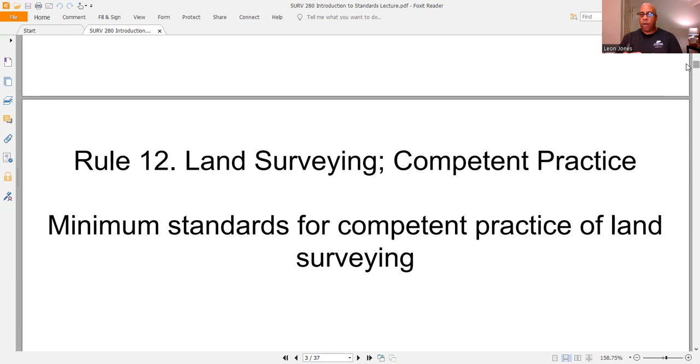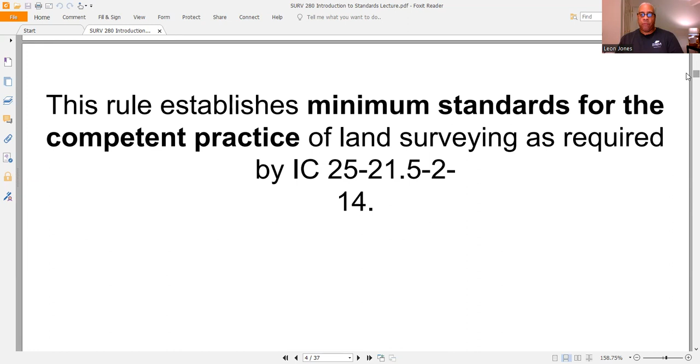All right, as I move down here. As we talk about the IAC, which is, of course, the Indiana Administrative Code, here we have the Indiana Administrative Code 865, Rule 12. Rule 12 is the minimum standards for competent practice of land surveying. Now, the rule establishes minimum standards for the competent practice of land surveying as required by Indiana Code, which is IC 25-21.5-2-14. And that says the failure of a registered land surveyor to comply with the provisions of this rule may subject the registered land surveyor to sanctions as provided in IC 25-1-11.

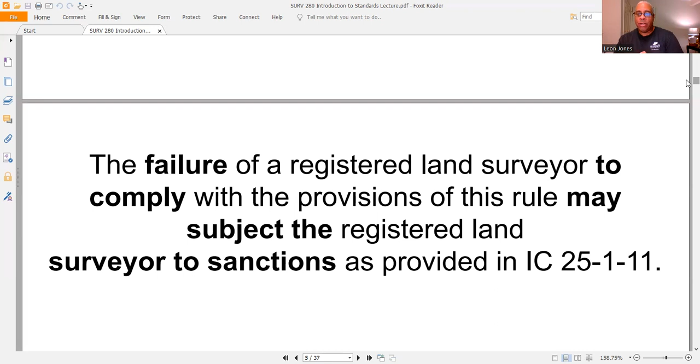Correction. Make a correction. The failure of a registered land surveyor to comply with the provisions of this rule may subject the registered land surveyor to sanctions as provided in IC 25-1-11. That's my correction. I said IC 25-11-1. Looks like I had a little dyslexia. I don't. I just read the information incorrectly. It's under IC 25-1-11.

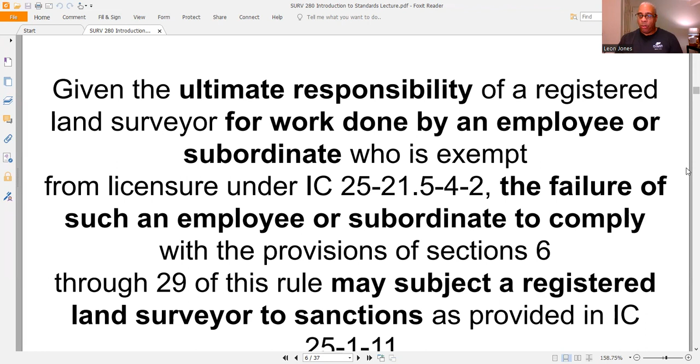Now, given the ultimate responsibility of a registered land surveyor for work done by an employee or subordinate who is exempt from licensure under IC 25-21.5-4-2, the failure of such an employee or subordinate to comply with the provisions of sections 6 through 29 of this rule may subject a registered land surveyor to sanctions as provided in IC 25-1-11, unless the registered land surveyor did not know and could not, with the exercise of reasonable diligence, have known of the act or omission by the employee or subordinate.

Nothing contained in this rule shall be interpreted to give the board authority to take action under IC 25-21.5-10 against a non-registered employee or subordinate of a registered land surveyor. And this is getting into ethics and law. See, a lot of people, when we talk about surveying, we always look at the field applications as if we're going out there with an instrument, a plumb bob, a steel tape or chain, or fiberglass tape and laths of stakes and hubs just to do a stakeout. No, what we're talking about here, we're dealing with the Indiana code. I'm sure all other states have their codes as well.

You have to have some standards for surveying to make sure that all of your surveys are done correctly. And without any standards, everything is going to be all over the place. The same thing would apply to a construction project. There are a list of standards. Now, I will tell you about this right now when it comes to standards. Standards, when we talk about meeting them, they're the minimum. So it's the minimum required that you have to meet. So you can go above and beyond, but you cannot go below. Again, you can go above and beyond, but not below. And anytime something is violated, it's going to go against these codes. And if you're a licensed land surveyor, you can go to jail, possibly pay a fine, could be criminal or something, or you could lose your license.

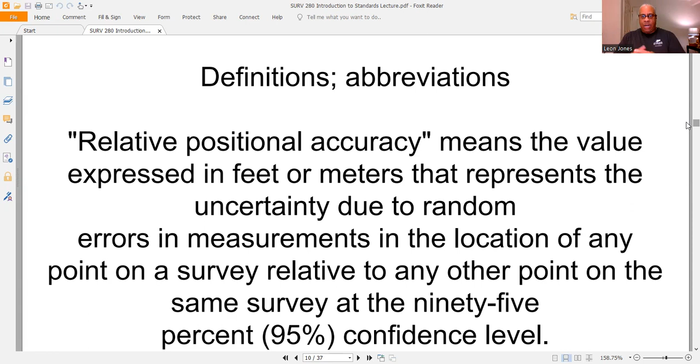Definitions, abbreviations. Well, we talk about RPA, you'll see that, which stands for relative positional accuracy, which means the value expressed in feet or meters that represents the uncertainty due to random errors in measurements in the location of any point on a survey relative to any other point on the same survey at the 95% confidence level. And that's when we get into error propagations and we start applying the 95% confidence level for error.

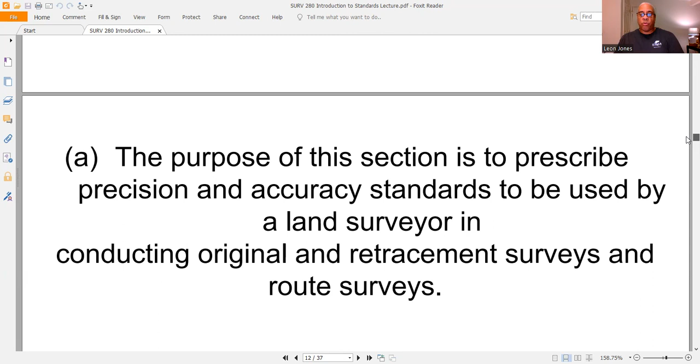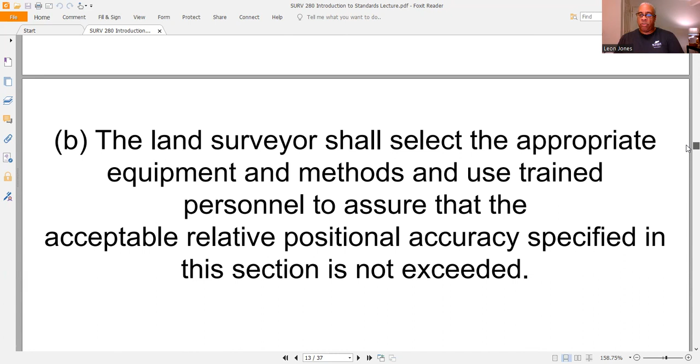Measurements for retracement surveys, original surveys, route surveys. The purpose of this section is to prescribe precision and accuracy standards to be used by a land surveyor in conducting original and retracement surveys and route surveys. The land surveyor shall select appropriate equipment and methods and use trained personnel to assure that the acceptable relative positional accuracy specified in this section is not exceeded.

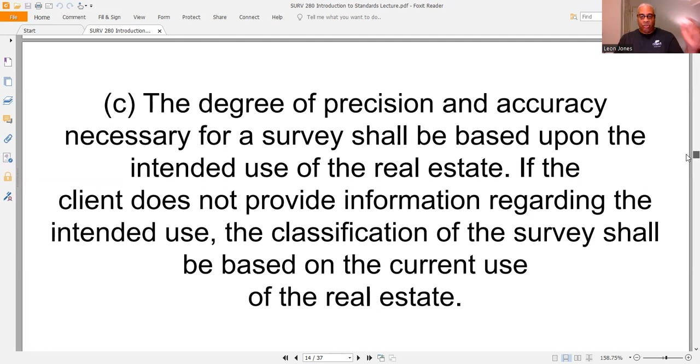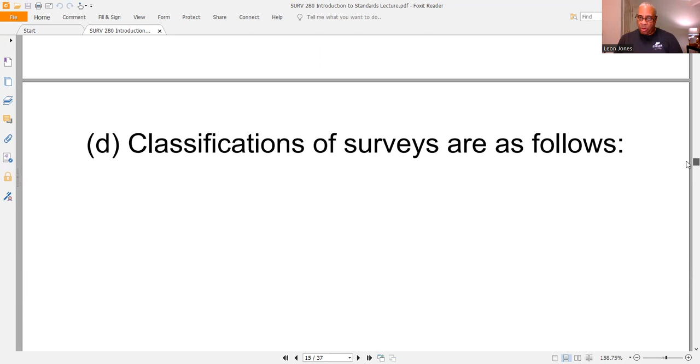Now, the degree of precision and accuracy necessary for a survey shall be based upon the intended use of the real estate. So if the client does not provide information regarding the intended use, the classification of the survey shall be based on the current use of the real estate. Now, classifications of surveys. One must understand there are orders, what we call them classifications. So what I'm going to do is get into the classifications of surveys. Okay, classifications of surveys are as follows.

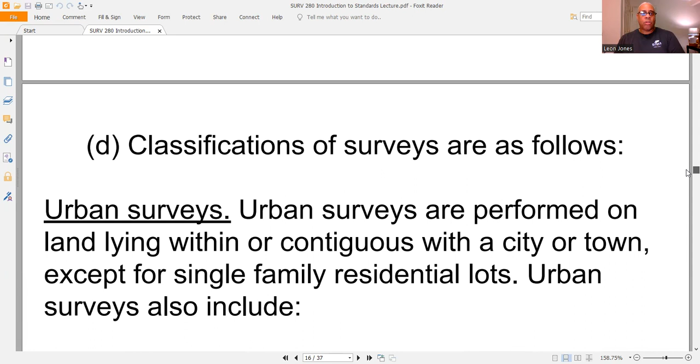Well, we have urban surveys. Urban surveys are performed on land lying within or contiguous with a city or town, except for single family residential lots. Urban surveys include commercial and industrial properties, condominiums, townhouses, apartments, other multi-unit developments, regardless of geographical location.

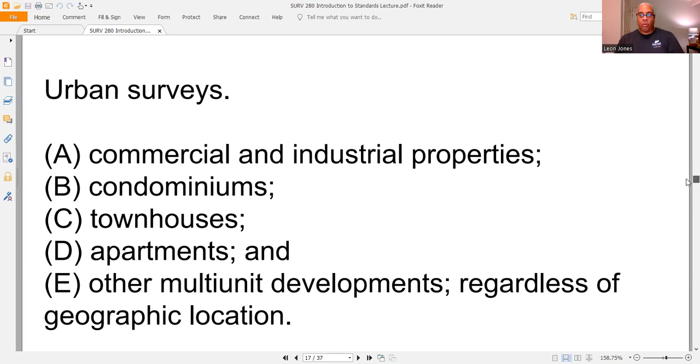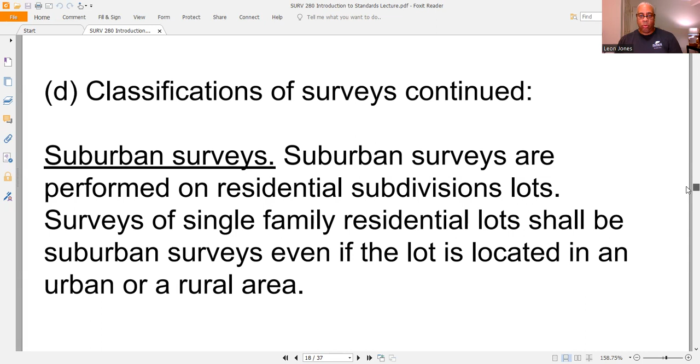Suburban surveys are performed on residential subdivision lots. Surveys of single family residential lots shall be suburban surveys even if the lot is located in an urban or rural area. Again, we deal with suburban surveys. They're basically performed on residential subdivision lots. These are surveys of single family residential lots that shall be suburban surveys, even if the lot is located in an urban or rural area.

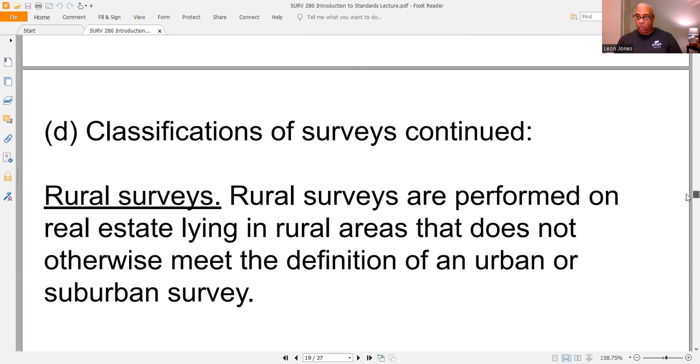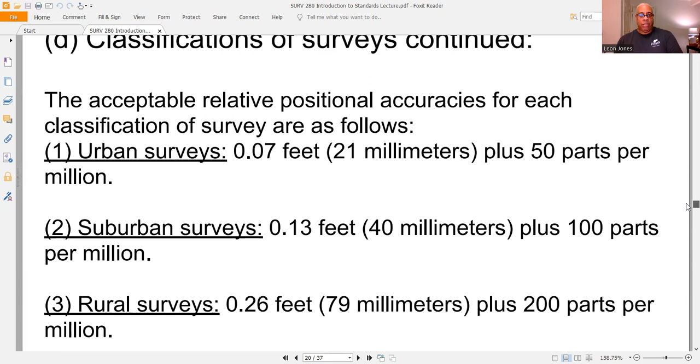Rural surveys are performed on real estate lying in rural areas that does not otherwise meet the definition of an urban or suburban survey. Now, I had this on a test. The acceptable relative positional accuracies for each classification of survey are as follows. Urban surveys, 0.07 feet plus 50 parts per million. Suburban surveys, 0.13 feet plus 100 parts per million. And we have our rural surveys, 0.26 feet plus 200 parts per million.

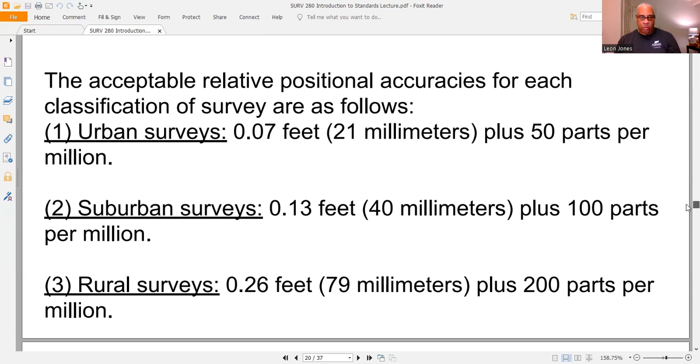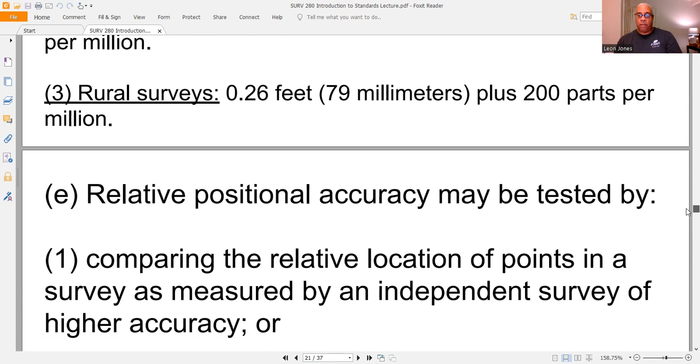Relative positional accuracy may be tested by comparing the relative location of points in a survey as measured by an independent survey of higher accuracy or the results of a minimally constrained, correctly weighted least squares adjustment of the survey.

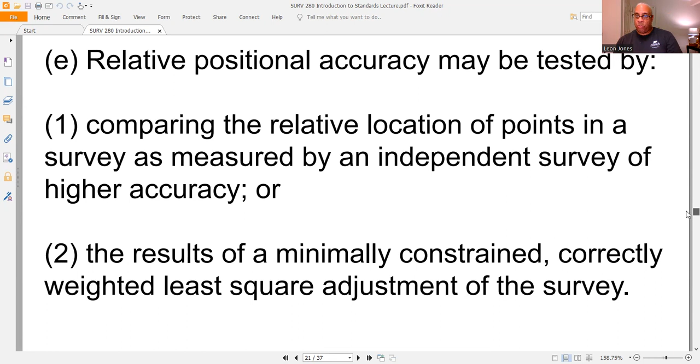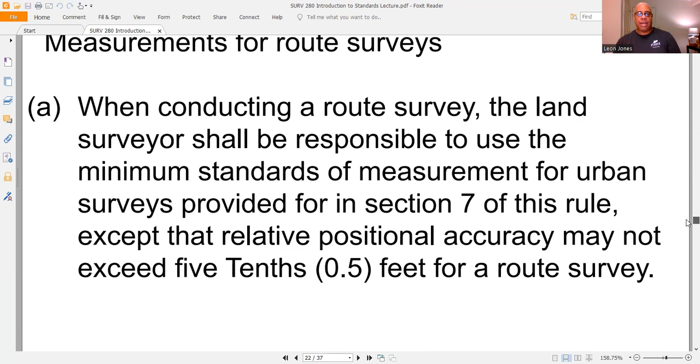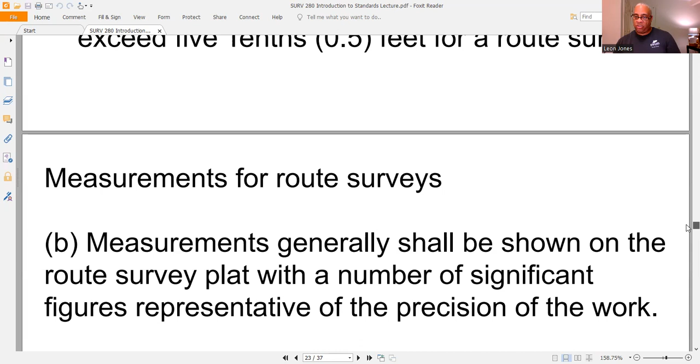Now, here are measurements for route surveys. Again, we deal with different types of surveys. So basically, when you conduct a route survey, the land surveyor shall be responsible to use the minimum standards of measurement for urban surveys provided in Section 7 of this rule, except that relative positional accuracy may not exceed 5/10, which is 0.5 feet for a route survey. Also, measurements generally shall be shown on a route survey plat with a number of significant figures representative of the precision of the work.

Now, we have minimum standard detail requirements for ALTA and NSPS land title surveys. Now, the purpose is members of the American Land Title Association, known as ALTA, have specific needs unique to title insurance matters when asked to insure title to land without exception as to the many matters which might be discoverable from survey and inspection and which are not evidenced by the public records. So basically, in order to meet such needs, clients, insurers, insureds, and lenders are entitled to rely on surveyors to conduct surveys and prepare associated plats or maps that are of a professional quality and appropriately uniform, complete, and accurate.

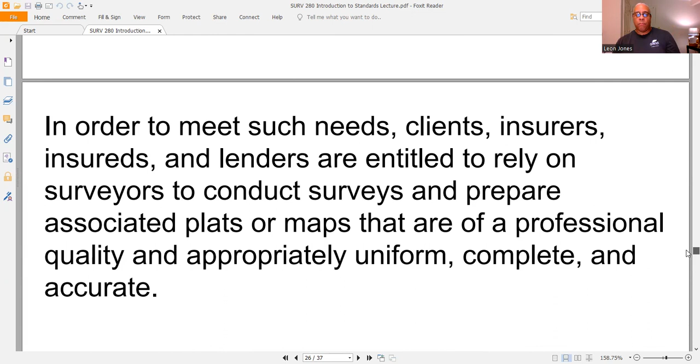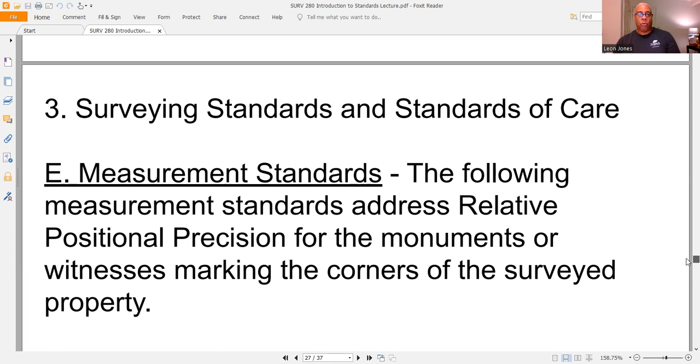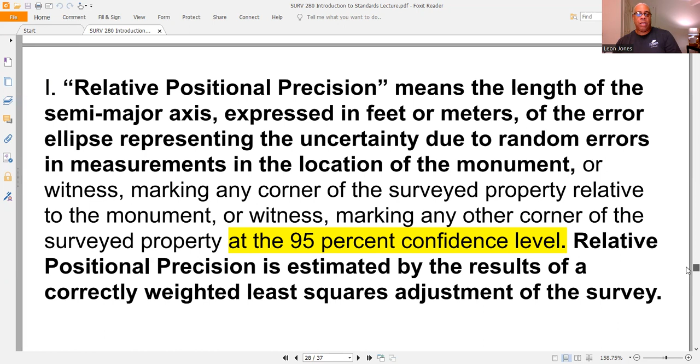Now, you have survey standards and standards of care. And part of this is going to be measurement standards. So the following measurement standards address relative positional precision of the monuments or witnesses marking the corners of the surveyed property. So when we have relative positional precision, it means the length of the semi-major axis, expressed in feet or meters, of the error ellipse representing the uncertainty due to random errors in measurements in the location of the monument or witness marking any corner of the surveyed property relative to the monument or witness marking any other corner of the surveyed property at the 95% confidence level. So basically, relative positional precision is estimated by the results of a correctly weighted least squares adjustment of the survey.

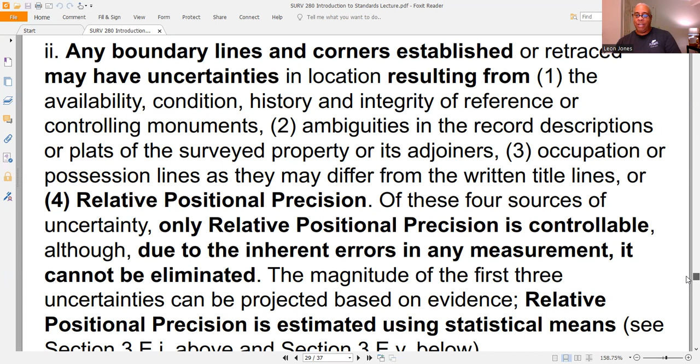So basically, any boundary lines and corners established or retraced may have uncertainties in location resulting from, number one, the availability, condition, history, and integrity of reference or controlling monuments. Number two, the ambiguities in the record descriptions or plats of the surveyed property or its adjoiners. Number three, occupation or possession lines as they may differ from the written title lines. Or number four, relative positional precision. So basically, of these four sources of uncertainty, only relative positional precision is controllable, although due to the inherent errors in any measurement, it cannot be eliminated.

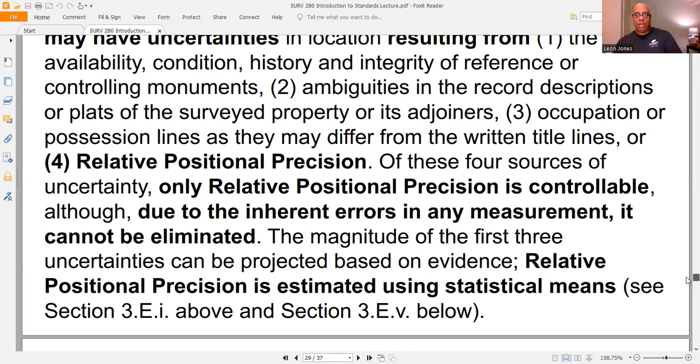So basically, the magnitude of the first three uncertainties can be projected based on evidence. So relative positional precision is estimated using statistics. Now, again, the first of these three sources of uncertainty must be weighed as part of the evidence in the determination of where, in the surveyor's opinion, the boundary lines and corners of the surveyed property shall be located.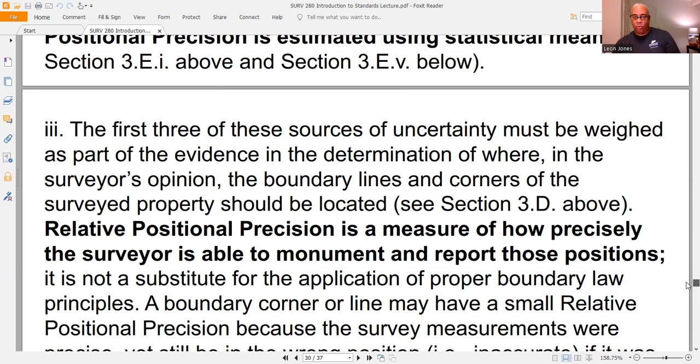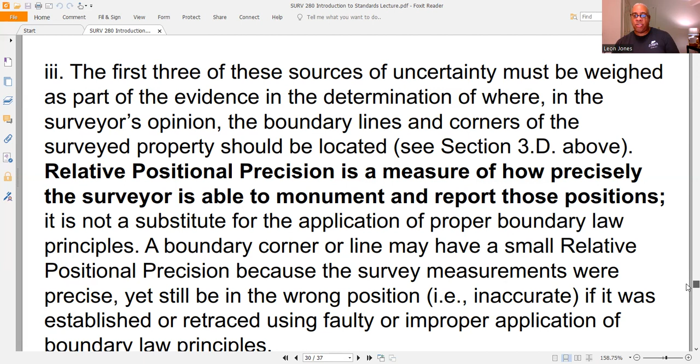So, relative positional precision is a measurement of how precisely the surveyor is able to monument and report those positions. So, it is not a substitute for the application of proper boundary law principles. Why? Because a boundary corner or line may have a small relative positional precision because the survey measurements were precise, yet they could still be in the wrong position, i.e., inaccurate, if it was established or retraced using faulty or improper application of boundary law principles.

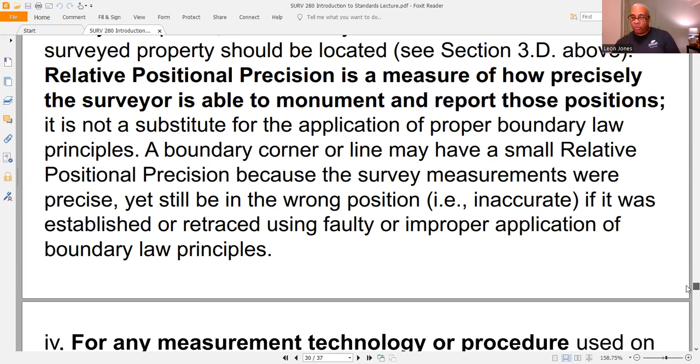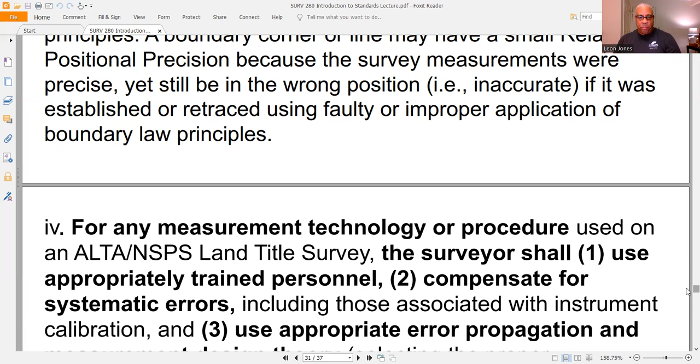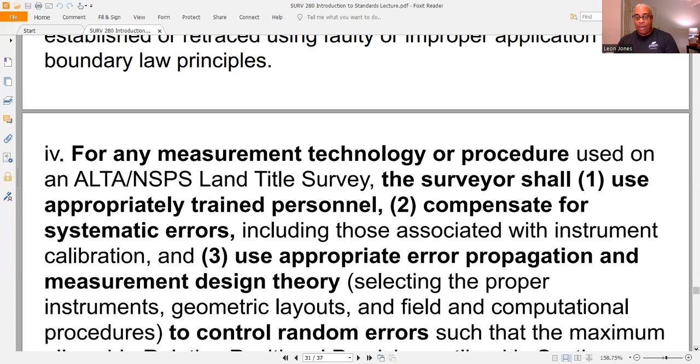Now, for any measurement technology or procedure used on an ALTA NSPS Land Title Survey, the surveyor shall, number one, use appropriately trained personnel. Number two, compensate for systematic errors, including those associated with instrument calibration. And number three, use appropriate error propagation and measurement design theory. And that's by selecting the proper instruments, geometric layouts, and field and computational procedures to control random errors such that the maximum allowable relative positional precision, which is outlined in section 3EV, is not exceeded.

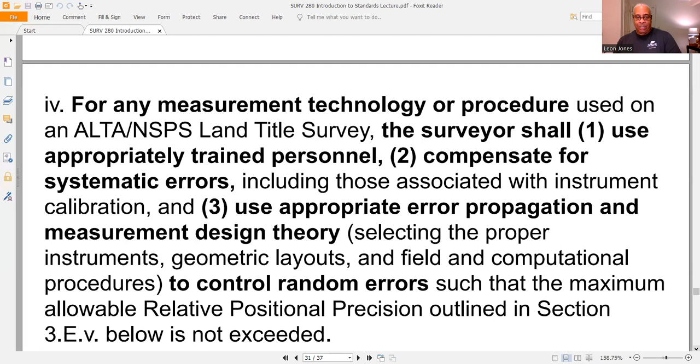Also, the maximum allowable relative positional precision for an ALTA NSPS Land Title Survey is 2 centimeters or 0.07 feet plus 50 parts per million. And where did you see that number 0.07 feet? I can tell you where I saw that number. That was in an urban survey. That was the accuracy, 0.07 feet plus 50 parts per million.

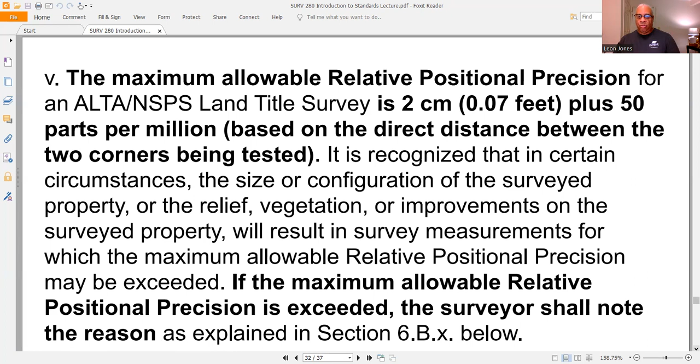And that's based on the direct distance between the two corners being tested, because it is recognized that in certain circumstances, the size or configuration of the surveyed property or the relief, vegetation, or improvements on the surveyed property will result in survey measurements for which the maximum allowable relative positional precision may be exceeded. Now, if the maximum allowable relative positional precision is exceeded, the surveyor shall note the reason as explained in section 6.B.x, other survey accuracy standards.

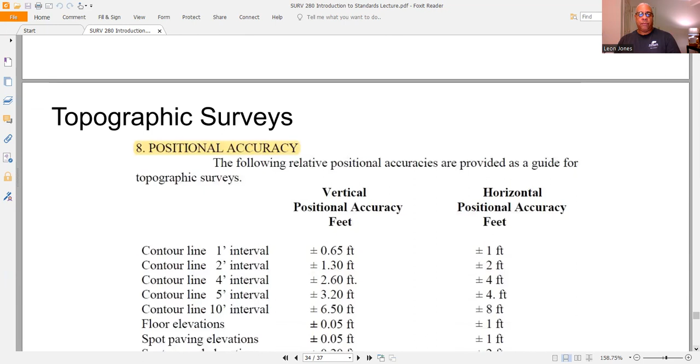We have topographical surveys or topos. So I will go over for you the positional accuracy. This is the positional accuracy. So the following positional accuracies are provided as a guide for topographical surveys. Now, what you have are the accuracies for vertical and horizontal, and you deal with contour lines of 1, 2, 4, 5, and 10-foot intervals. You have floor elevations, spot paving elevations, ground elevations, invert elevations, and well-defined planimetric features. And here are all the accuracies that you have for vertical and horizontal.

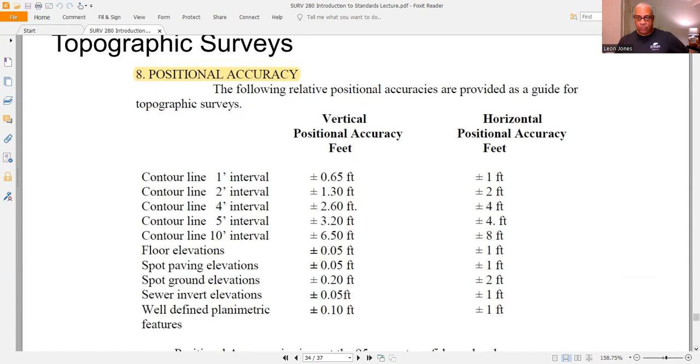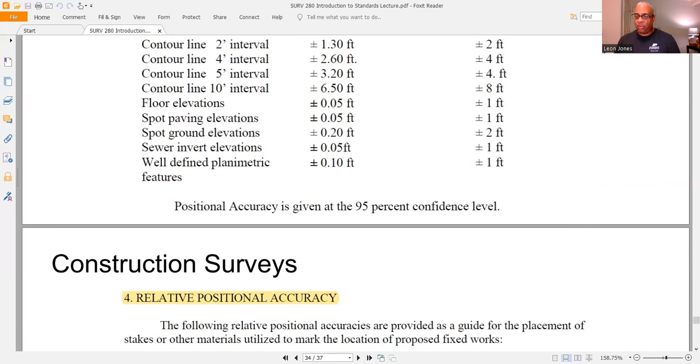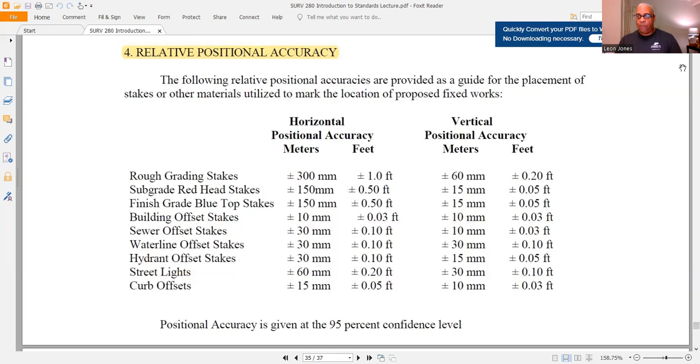And the positional accuracy is given at the 95% confidence level. Then we go down to construction surveys for the relative positional accuracy. And again, the positional accuracy is given at the 95% confidence level. But now, the following relative positional accuracies for construction surveying are, again, provided as a guide for the placement of stakes and other materials utilized to mark the location of proposed fixed works.

And what you have are two columns, in feet and meters, of horizontal positional accuracy and vertical positional accuracy. And then when we deal with construction, you're going to use stakes, cut and fill. They're called grade stakes. So you're going to have rough grading stakes. You see an F, that's a fill. You see a C, that's a cut. Those are grading stakes. Then you're going to have subgrade redhead stakes, finished grade blue top stakes, building offset stakes, sewer offset stakes.

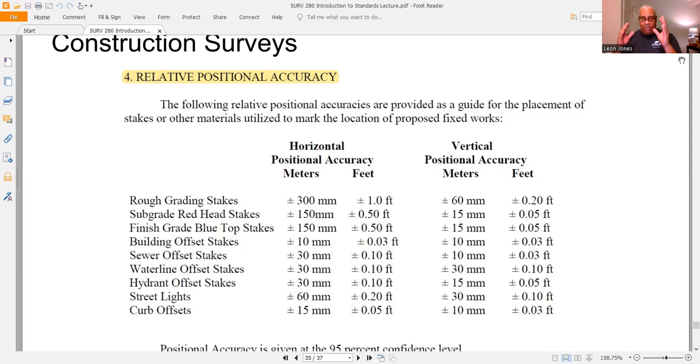That's right, sewer offset stakes, waterline offset stakes, hydrant offset stakes, street lights, and curb offsets. Again, you see the columns, horizontal and vertical. The accuracies are in meters and feet.

Moving on. Then we get into what we call GIS, Geographic Information System Surveys. And we have the minimum horizontal accuracy. So basically, for GIS, the horizontal accuracy is based on the American Society of Photogrammetry and Remote Sensing, known as ASPRS, standard for Class 2 and reported in agreement with the National Standard for Spatial Data Accuracy. So the NSSDA horizontal positional accuracy statistic is at the 95% confidence level and is determined by multiplying the root mean square error, known as RMSE, of the data set by 1.7308.

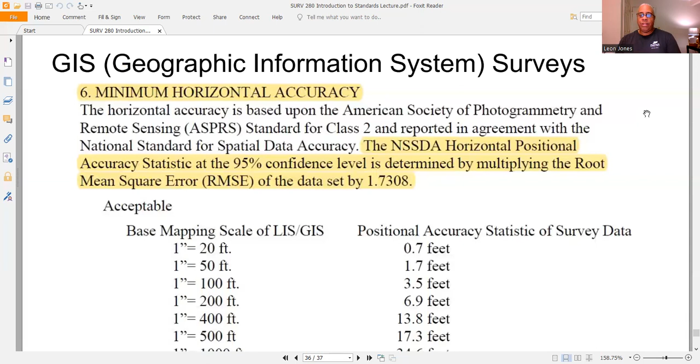And if you look at what's acceptable, you have the columns, you have the base mapping scale of LIS and GIS, and you have the positional accuracy statistic of survey data. And here are your maps. And here is your accuracy.

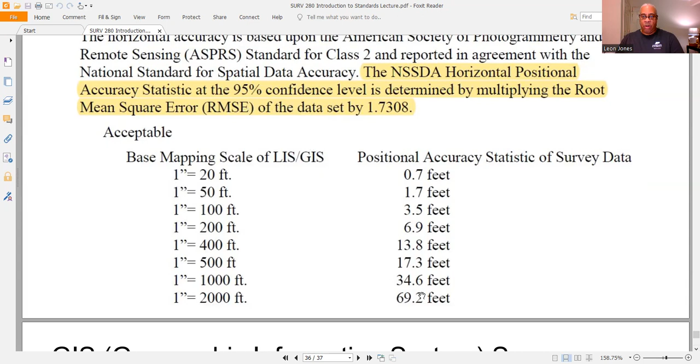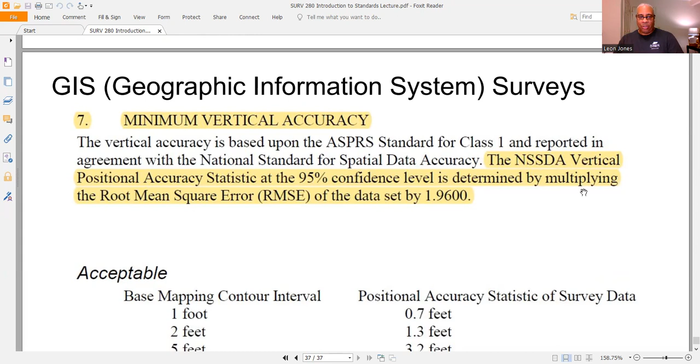Now, when we deal with geographic information surveys, we also have a minimum vertical accuracy. So the vertical accuracy is also based upon the ASPRS standard for Class 1 and reported in agreement with the National Standard for Spatial Data Accuracy. So the NSSDA vertical positional accuracy statistic at the 95% confidence level is determined by multiplying the RMSE, which is the root mean square error of the set, by 1.96. And moving on, we have the base mapping contour interval, and we have the accuracy statistic of survey data.

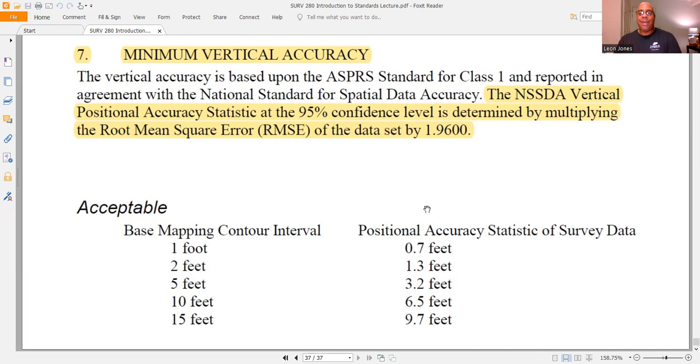And there you have it. When it comes to surveying, you have different types of surveys. Again, they're urban, they're rural, there's GIS, there's route, there's construction, there are topographical surveys, there are subdivision surveys. Well, when you go out in the field, you have to follow those standards.

Now, again, those standards are based on giving the minimum. So you can do more than the minimum, but you have to at least meet the minimum of what that standard requires. And when it comes to surveying, you have your parts per million, you have your significant digits. You also have, if you're doing a traverse, you have your closure. There's the least squares method.

And least squares method can be a complicated method because it is very mathematical and you have to deal with a lot of matrices. And those matrices can get really, really long by hand. So there's a software out there called Wolfpack that'll do it for you. And again, there are rules that you must follow when you deal with surveying. And if you don't follow those rules, you could lose your license.